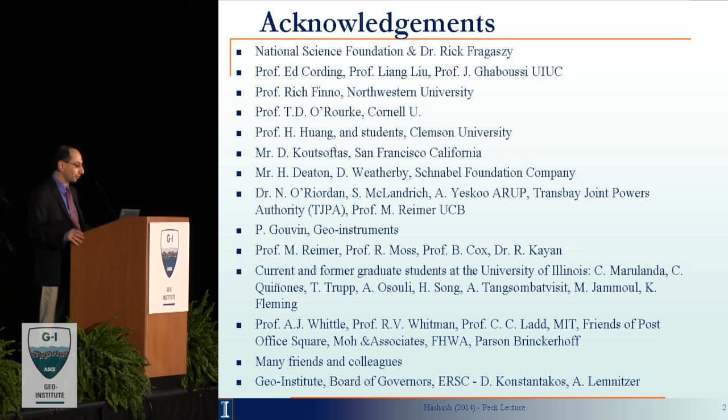Of course, my PhD committee at MIT, Professor Whittle, the late Professor Whitman, Professor Ladd, who's with us here today, many friends and colleagues, people at Parsons Brinckerhoff, and the Geo-Institute and the Earth Retaining Structures Committee.

I will first start with an introduction, motivation, what's the problem, what it is we're trying to go after. Then I'm going to describe three themes, three key technologies that I would like us to discuss. Acquiring a construction record via imaging technologies and social media.

For the young in the audience, there's some for you there as well. Think of the construction record as the action, the cause. Then we have ground and infrastructure response monitoring via network instrumentation and sensors, and this is the reaction of the ground to our excavation activities in urban areas. Then we bring those two together, and this is where we talk about modeling and estimation of ground response via self-learning algorithms. And then I'll have some concluding remarks.

Now, it's quite fitting to start the motivation for this work by the pioneering work of Dr. Peck and his work on the Chicago subway, where he represented Karl Terzaghi, all things Karl Terzaghi had to communicate and consult on for the project. And there they really highlighted the importance of the relationship between excavation support, construction sequence, and deformations and impact on surrounding structures.

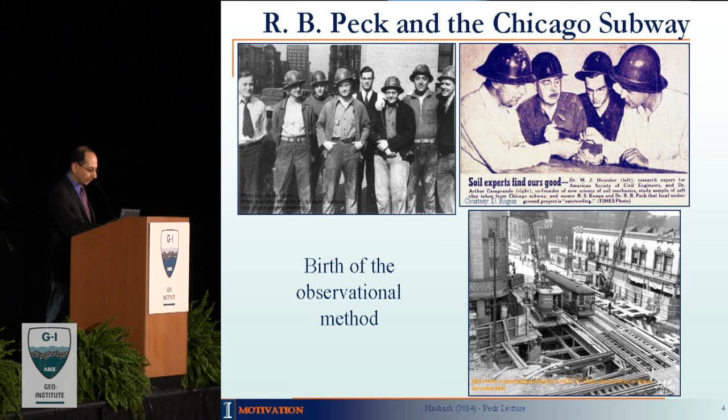And that led to the birth of the observational method. For those of you who may not know where Dr. Peck is in this picture, he's actually here. This is Dr. Peck, and also here in this image. And this is an image down here of the Chicago subway activity.

Going along with the theme of this conference on sustainability, underground urban space is essential for having sustainable cities. It will allow us to put many of our infrastructure below ground and enhance the living environment.

Now, I do recognize there are many issues and controversies associated with the Central Artery, but let's put these aside for now. We continue to be interested in exploiting underground space throughout the country. It is really a hot area. Underground construction is really interesting and challenging in my opinion.

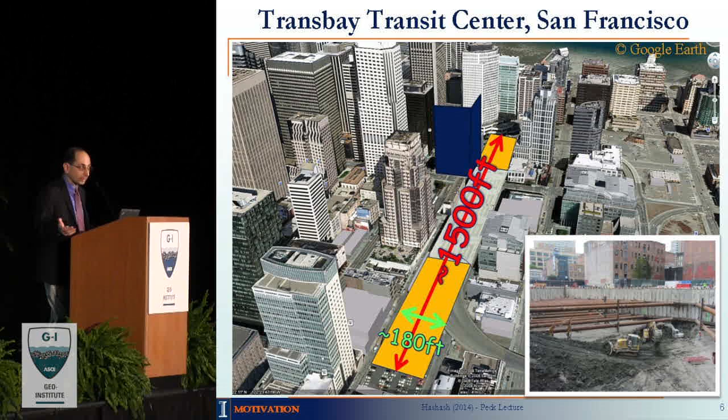Here I'm going to describe to you a project in San Francisco. It's called the Trans-Transbay Transit Center, which is designed to house what people are calling Grand Central Station of the West. It's a massive excavation, 1,500 feet long, 180 feet wide, and 60 feet deep in soft to medium clays, in a heavily built environment. So we want to develop that without shutting down the city, and also without damaging our adjacent structures.

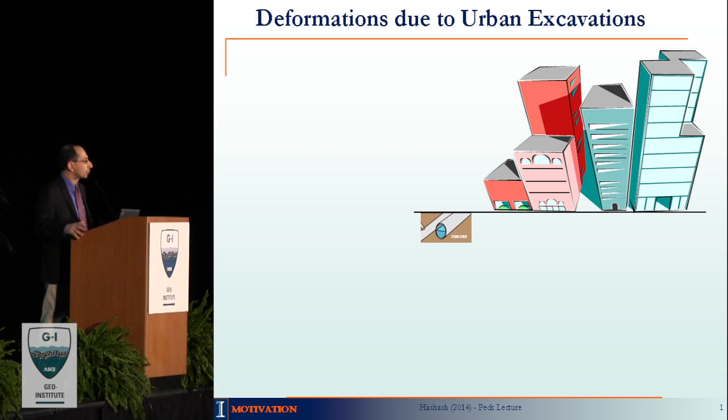So as engineers, if we look at this process in a simplified fashion, we want to build an underground space. So we pre-install our walls, and we start excavating and installing our bracing system. And because we are unloading, removing soil and reducing stresses, there's going to be a reaction, the ground will move, and we will have some wall deflections.

Now, these deformations will propagate through the soil and manifest themselves in terms of surface settlements and lateral deformations towards the excavation. If these are excessive, then we're going to have potential damage to our infrastructure, cracking of buildings, damaging the utilities. Our challenge as engineers is to develop this underground space efficiently with minimal disruption.

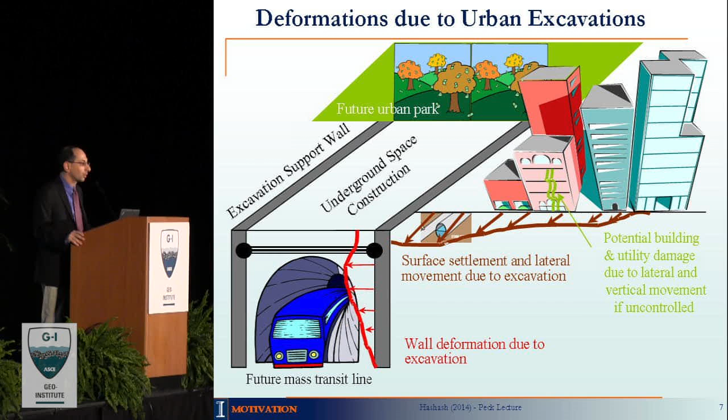It cannot be zero. Many of you who practice in this area, when you go and ask the third-party owners, so how much deformation can your structure tolerate, they say zero. Well, we know that cannot happen. So we are going beyond just simply looking at failure for these type of excavations. We are interested in keeping our deformations small.

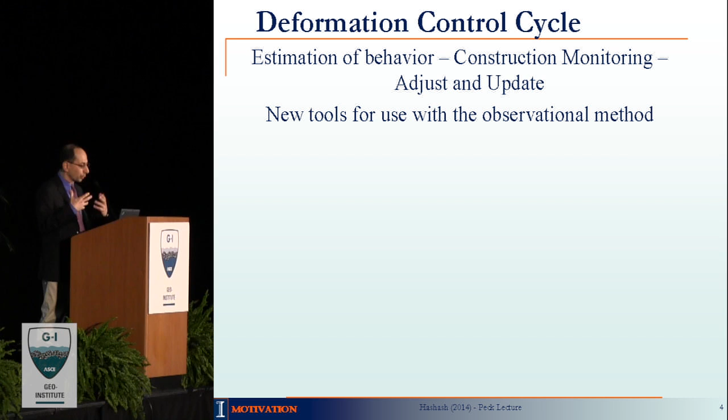So we need in our engineering to estimate the behavior. We want to control our construction, and we want to be able to be flexible, adjust and update. So what I'm going to talk about are a number of tools that will help us support the observational method. Our objective is to develop the space economically.

You want to try to control cost, but also you want to minimize the impact on existing infrastructure, and there's a tension between those two requirements. We want to have some estimate of the deformations ahead of time, the impact. We have to do a very good and detailed field and laboratory investigation program. Then we develop our design, and we go out for construction.

We want to keep track of that, and we need a very good record, because the deformations are quite sensitive to the particulars of the construction activity. Then we have field data monitoring, where we put our instrumentation and see the response of the ground. We want to present that in a way that is useful to us as engineers, and compare it with our initial estimates. Often enough they will be different.

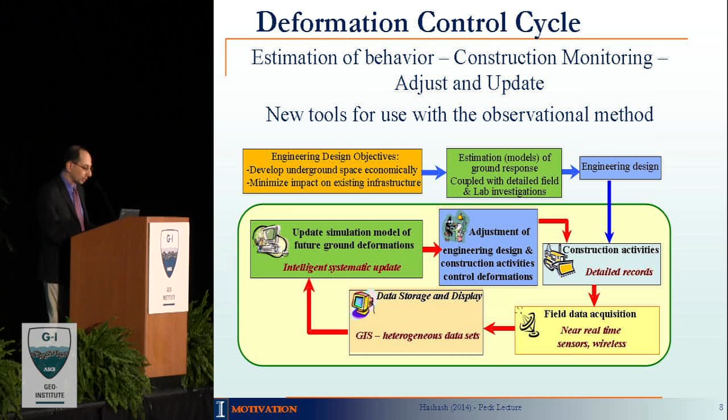We want to understand the differences. We want to be able to update our models, and learn from these observations, and then potentially make adjustments to the construction sequence, to the design, or potentially do nothing and just say everything is okay. So we've been working extensively on this loop, and I will be spending quite a bit of time talking about the construction record, field data, and the update of our models.

So we need to control for the construction process, but also we need to keep track of it. We also need a fairly comprehensive monitoring program, a fairly detailed monitoring program. And then we want to use that cause and effect information to develop higher fidelity models, because our structures are so sensitive to these types of deformations.

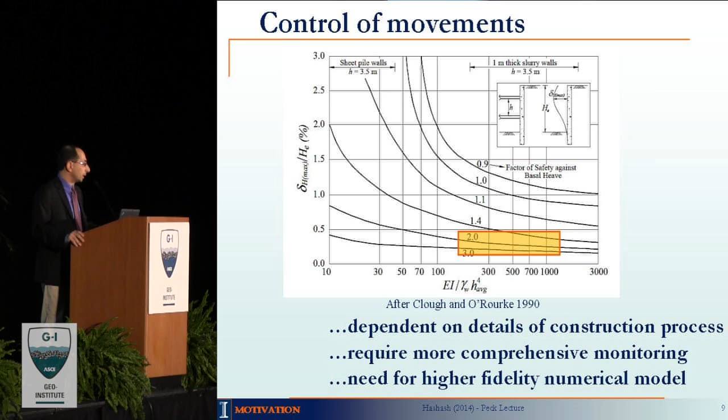Now, we'll start with the record of construction activity, and for many of you who've also been working in this field, you know that this is actually an issue. You have the resident engineers probably developing sketches of what's going on, probably not sufficiently detailed and sometimes inaccessible. We want a record that is readily accessible to the engineers and has a high level of fidelity. For that, we want to be able to capture the geometry, the change, where the berms are, when the struts or the tiebacks were installed.

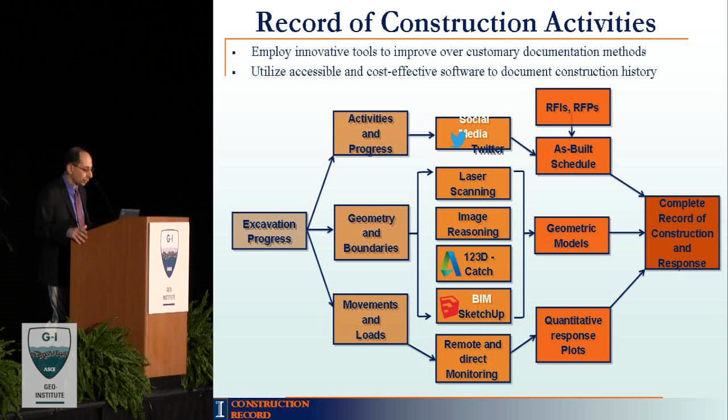So I'm going to discuss four technologies: laser scanning, image reasoning, 123D Catch, and BIM-type capabilities, SketchUp, to develop our geometric models. But not everything can be captured via imaging. We want to have a record of what's going on in terms of activities, and I'm going to describe how Twitter is being used to capture that valuable information. And of course, we have our quantitative monitoring of deformations and pore pressures that will allow us to complete the picture. So let us start with 3D laser scanning.

Some of you might know it as LiDAR, which stands for light detection and ranging. It's a principle of pulse time of flight. You send out a laser impulse in a particular direction, you time the return of that impulse, and you can calculate the distance. And if you do that many, many times, you're going to capture geometry.

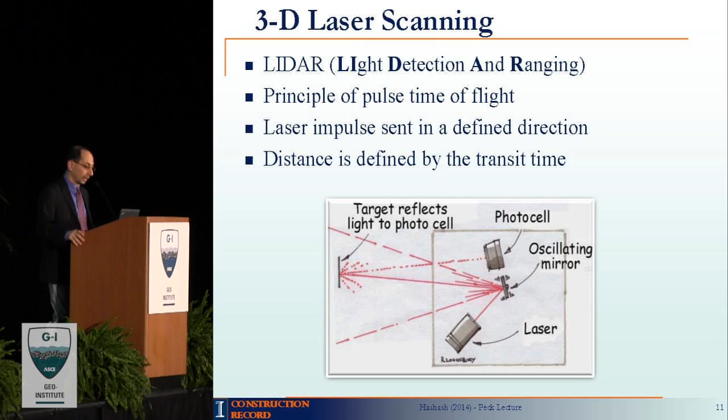So we did this work in 2004. The machine at that time cost us around $150,000 or so, and we wanted to see, would it work? It had actually never been done at that time. I think Professor Daniel remembers this discussion from when he was at the University of Illinois. We wanted to explore whether it works in a practical fashion. So in collaboration with Professor Finno, there was an excavation literally in his backyard that we had access to, and we could try all of that.

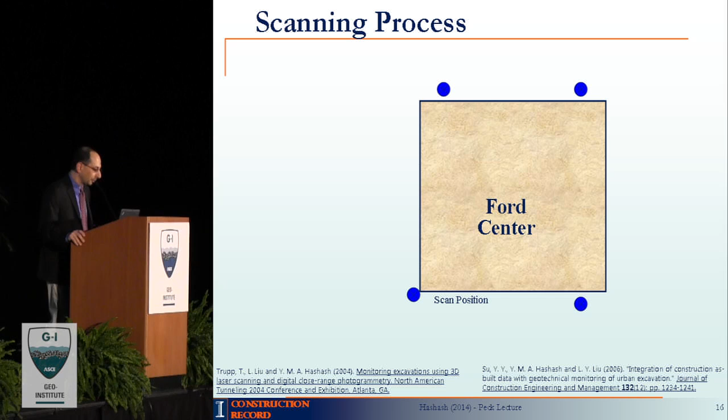Notice we started on January 30th, 2004, and we needed to see how we were going to execute this campaign. This is a line-of-sight technology, so you have to have visual access to your site. You need multiple points where you can station your laser scanner. Our laser scanner at the time had a 40-degree by 40-degree window. Nowadays, you can have them almost 360 by 360. So we needed to do multiple scans at multiple points, and then we compile all of those into a 3D model, a 360-degree model to scale.

The thing we discovered is you do not need to be at the exact same points every time you do the scanning, and that's important because of issues of accessibility on an active construction site. So that was quite helpful. We did the work about once a week. We would send out the students and spend about half a day doing that. If you can see the temperatures, they didn't call it the polar vortex at the time, but it was quite cold: minus 5 degrees, minus 25 degrees with wind chill.

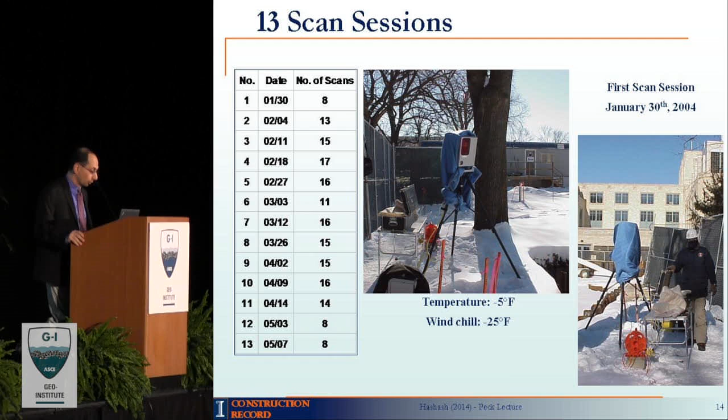And this was a good way of testing whether this thing would work. So we put heating blankets on the laser scanner, heating blankets on the laptop, and we had a generator. And our students, whenever they were cold, just took a run around the site, got warmed up, and then continued the work. So you do that, and then what can we do with this? You start with these individual scans, and then you have to stitch them. You have to develop an appropriate coordinate system.

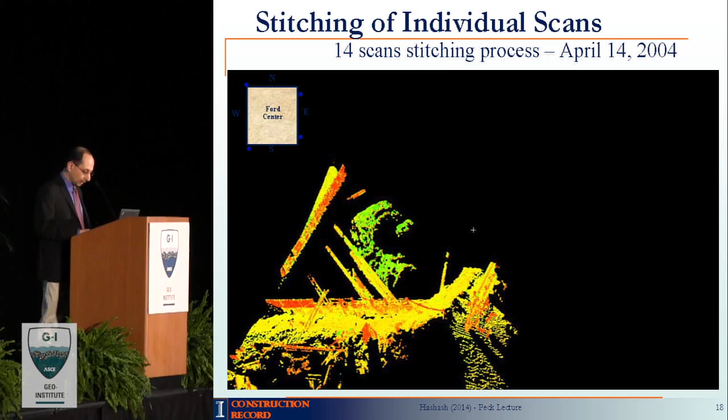And slowly you end up having a beautiful image, looks really nice, of the excavation, 3-dimensional to scale, within an accuracy of around 5 millimeters. So it's good for geometry, it's not good for deformations, this particular technology.

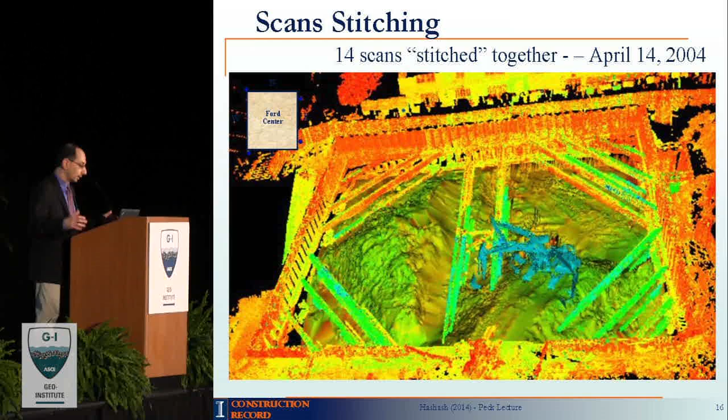Now, you can do a lot of things with this image. You can clean it up, and it'll actually scan everything inside - trees, buildings, people, excavation equipment. If you see here, for example, the excavator was moving. But what you have is a very nice image of your berms, which we know are important for estimating the deformations and doing our numerical analyses.

So we can clean this up so we can focus on our excavation, take out the excavator, take out our bracing system, and we have a very nice surface that we have a very good geometry of.

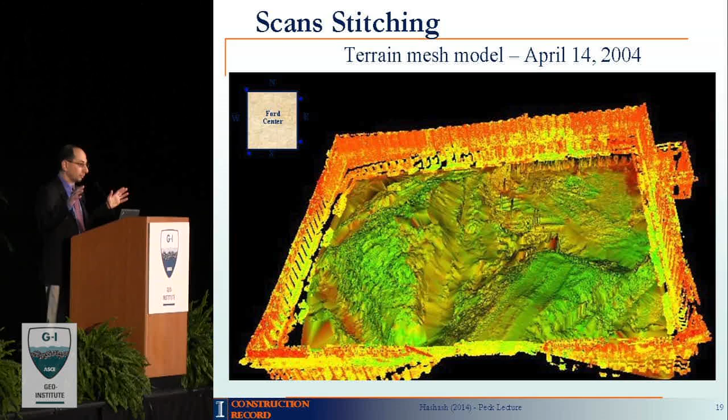It's very hard to send down surveyors into an active excavation. It's costly, it takes time, they get in the way of equipment, it's dangerous. So now I can remotely do all of that, acquire that information. I can take cross-sections of the site, and I can estimate where I am in terms of what layers I'm removing and how I'm moving the soil around, where my bracing is.

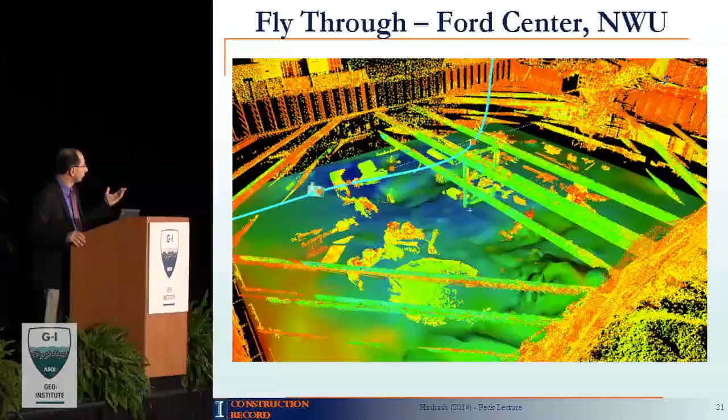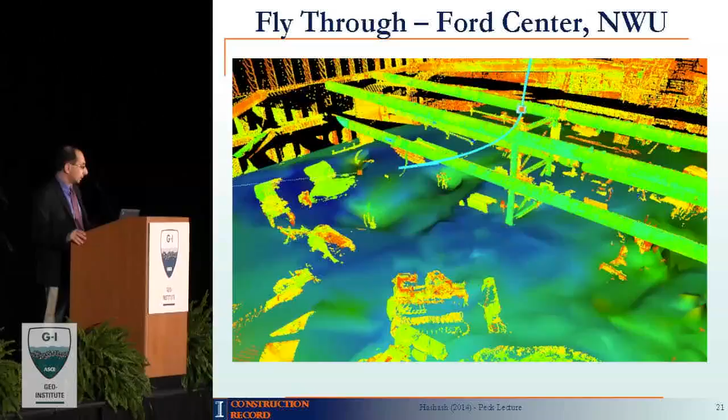And I can develop some really cool stuff. This is actually a fly-through. You're looking at a to-scale image of a 3-dimensional model of the excavation. We can get the positions of everything at the site, sizes of walers, the geometry, and a level of resolution and fidelity that we've never been able to capture in our excavations.

So really, it proved to be successful. It was a time-consuming effort - there's a fair amount of work you have to do out in the field, as well as processing back in the office.

We could do that, and we did that once a week. But when construction is going on, there are some important activities going on in between, and you sometimes need to know what's going on a daily basis, because it affects your interpretation of monitoring data, which I'll talk about in a bit. We weren't able to get it in an almost continuous fashion. So if we think of our laser scans as sort of a boundary condition of a problem, we decided to explore the use of webcams as tools to look at what's happening in the interim.

We can set up these webcams, and program them to take pictures as often as we want. On the project site, we did it once an hour. But you can end up with a lot of images. And if you were to go manually through those images and try to figure out what's going on, again, you won't have a lot of time to do that.

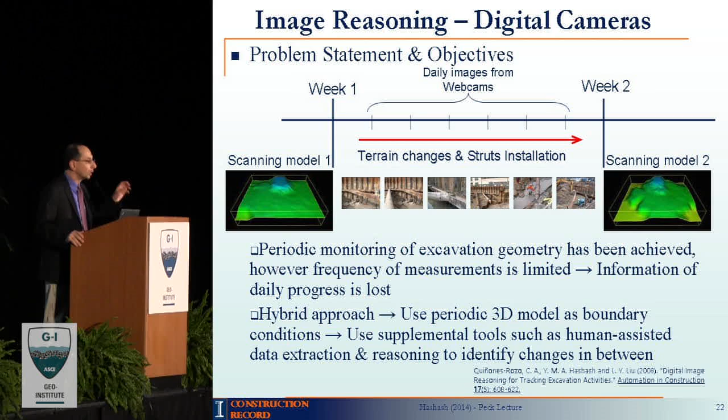So we wanted to see, are there techniques, are there ways where we can go through this information and process them in an automated fashion to highlight the changes. And that brought us into a realm of image reasoning. Of course, it's all enabled because we're using digital technology, digital images, and we have a spatial matrix, and numerically, we can represent the pixels and the colors.

The challenge for us was when you look at excavation surfaces, these are low-intensity, contrast type of surfaces, and simply doing a comparison between two images is not going to let us find out what's going on or detect that in an automated fashion.

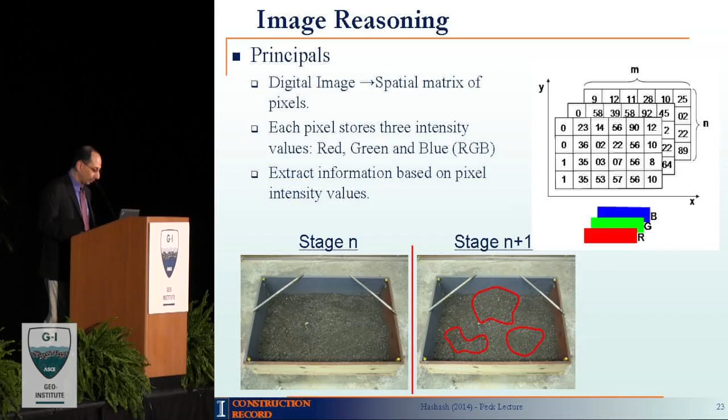This is when I was introduced by one of our students, who really went out of his way to look into these technologies - concepts we call morphological operators, whereby you do something called dilation of an image or erosion, and then you can do an opening and closing of an image. I won't go into exactly how you do that, but these are things you can do to manipulate a digital image that way. And then also we looked at how you take an image, get its negative, and when you add these two together, you end up with white space. So we took advantage of that.

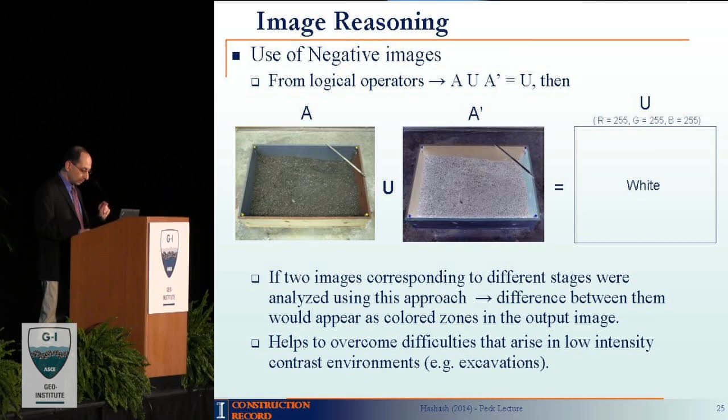The clever thing in this process is you take two images at two different stages of excavation - we had to try it in our labs before we went out to the field. You take an image, get its negative, and then close it. You take an image of a later stage and open it, and then you add those two images up, and what you're left with is the contrast of where the changes happened at your site.

And then you superimpose that on an image of the site, and you can see automatically where the changes happen. So this way you can process large volumes of images to pinpoint where the changes happened.

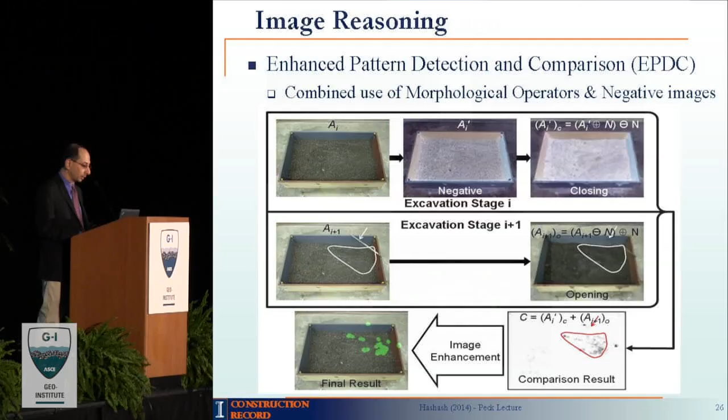In order to do that, we actually used Block 37 in Chicago, again in collaboration with Professor Finno. We had 2 days, August 8 and 9 of 2006, and at the time that camera was actually a low-resolution camera. We ran it through that process, and it captured that for us.

You'd say we have really nice techniques, good techniques that will allow us to capture this construction record, but we really were not satisfied. It's expensive to get a laser scanner. It's cheaper now, but it's still expensive. It is time-consuming and resource-consuming.

So we looked at, well, how about if I have my phone with a camera, and I go inside the site and start taking pictures. Can I develop a 3D model of that? If you're familiar with the principles of digital photogrammetry, we can do that, but you have to be at a particular location, particular distances. Your cameras have to be at a certain offset.

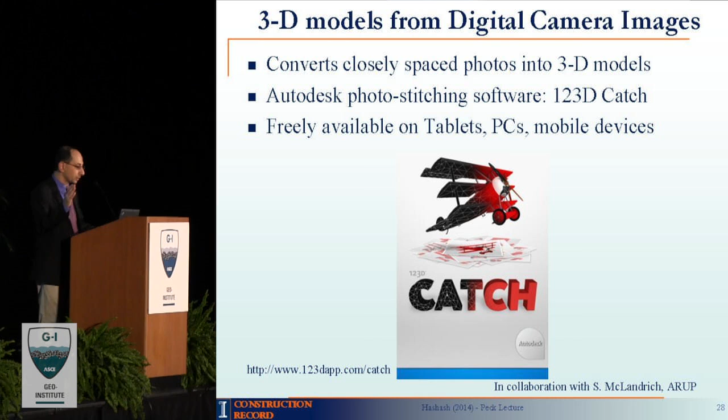We wanted something more practical. You're going down the stairs, down an excavation, you stop, take some pictures. Can I do that? Thanks to collaboration with Stephen McLandrich at Arup, we found this really fantastic software called 123D Catch. It's freely available, and it will allow you to develop 3D models from closely spaced photos, but you do not have to strictly adhere to principles of digital photogrammetry. We tried it on the Transbay Transit Center in San Francisco.

This is some of the excavation work going on there with the bracing and the berms that are on site. We went there, took those images, fed them through the software 123D Catch, and ended up with this three-dimensional model of the excavation. You can see the berms, you can see the struts, and you can see also a little bit that I have some incomplete images of the struts. That's because it's also a line-of-sight technology, I need to have coverage vertically as well.

Keep that in mind, because at the end of this talk, I'm going to tell you a potential solution to this limitation. But also look at the promise of this technology.

I use my phone or a better camera, a nice digital camera. Even if you get a really good one, maybe I can get a $1,000 camera. I can do it with a $200 camera. And I use a free software, and I can get now a 3D image versus a $150,000 investment that I would need to make with a laser scanner. So really, this is a tremendous development, and this happened just in the last 14, 15 years of research in this area. We can really do things that we couldn't think about before.

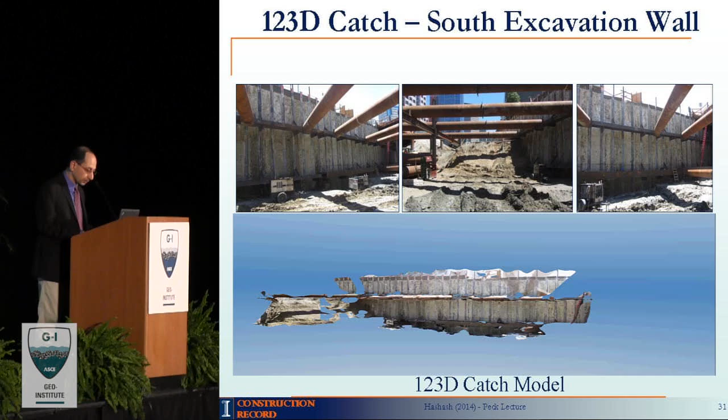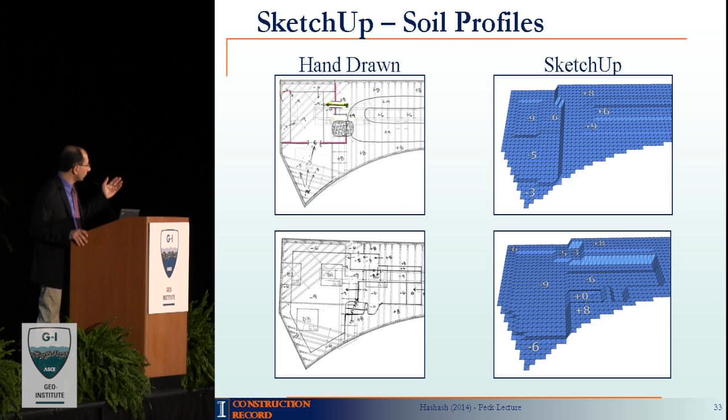Another thing we wanted to look at is how do we keep track of excavation activities, whereby the engineers keep developing these hand sketches, and we wanted something that is again accessible. I don't need a major platform, something that engineers can run on their PCs, students can do in the office at the university. So we were using this software SketchUp, whereby we took some of the hand records from the engineers and programmed them in the software.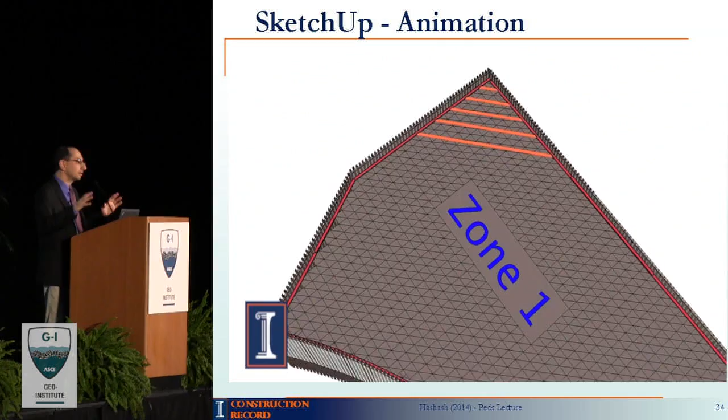What we were able to do also is to develop an animation, a three-dimensional model that will show us the progress of construction. We're able to match it with a date timeline. We can show the installation of the walers, the bracing, and then the development of the berms. And this is using a relatively inexpensive, off-the-shelf software.

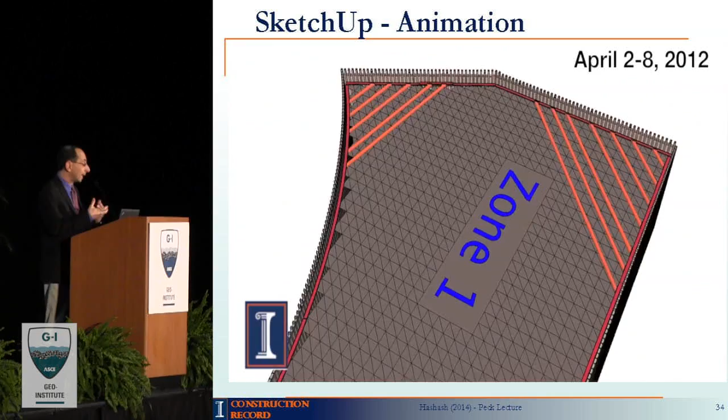Then I can take this three-dimensional model and use it in my analysis. I need that to keep that record in one place. Notice there I'm also using a digital record now, as opposed to just having sketches on a piece of paper.

Now, not everything at a site can be seen. If you're installing piles, it's happening below ground. So how do I keep track of that? On the Transbay Transit Center, the engineers came with an idea of, well, why don't we use an existing platform, Twitter? Many of the younger people are quite comfortable with these technologies and said, okay, why don't we tweet these various activities? This way you don't need a cumbersome procedure to keep track of things.

Moreover, because they were doing the operations sometimes 24/7, the engineers, even when they're going to sleep, could quickly check what kind of issues there are, what kind of progress we have. We had access to that, we could see them live, but more importantly, we were able to mine this data afterwards to develop, for example, the construction sequence of one of the shafts.

Coincidentally on the project, due to a very attentive crane operator, they found a woolly mammoth tooth at the bottom of one of these shafts.

They were grabbing these with a clamshell bucket, and they were dumping it, and the person saw it. It's now, I think, at the California Academy of Sciences.

So we have a number of technologies available to us to help facilitate the capturing of this construction activity, which represents the action.

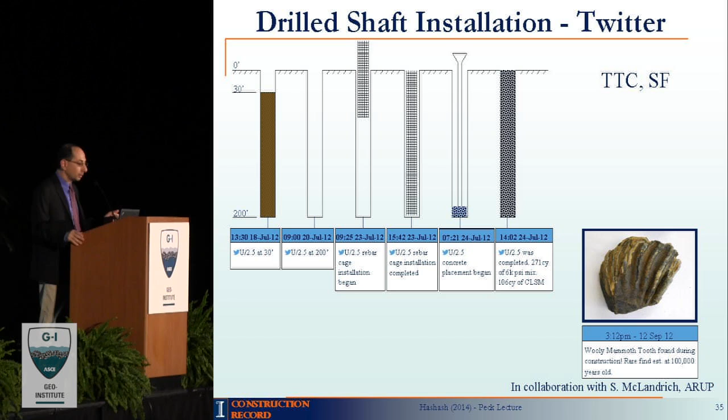Now let us move on to see how we're going to measure the reaction of our ground, how the ground is responding. The last 15 years saw tremendous development in automated and remote sensing, most notably automated total stations, where we can have targets all around a site and then automatically, sometimes on the hour, just measure deformations of buildings, of ground surface.

We've also seen a lot of developments in in-place inclinometers, extensometers, piezometers, settlement meters, strain gauges, and our ability to network these via wires or wirelessly.

The wireless networking has been quite beneficial to us because we don't have to worry about stringing lines, which would be exposed to damage, or having to wire antennas and then deal with power supply issues.

Using even cellular wireless technology, we're able to capture that data from fairly close to the source and allow us to have almost near real-time access.

Now, I should mention that while we have made a lot of advancement in terms of real-time and in-place monitoring, we still have significant challenges. For example, we find that through the use of MEMS technologies, these sensors sometimes go haywire on us, and we need significant developments so that this technology would last us for the 3-year duration of a project. I'll talk a little bit more about some of our needs in this area.

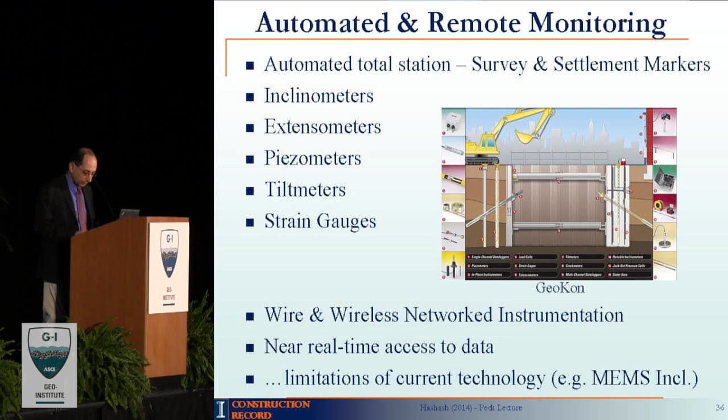So let me illustrate to you some of the technologies we have. For example, this is a total station, and this is a wireless antenna that will allow you to receive that information. So nowadays, on your smartphone, you can see what's going on at your site at any time of the day. Here also I'm showing you the webcam that was available to us.

This is the total station on the Transbay Transit Center project, and the targets were installed on the wellheads for inclinometers, which also doubled, by the way, as antennas for the wireless network. That was really a very nice development and innovation.

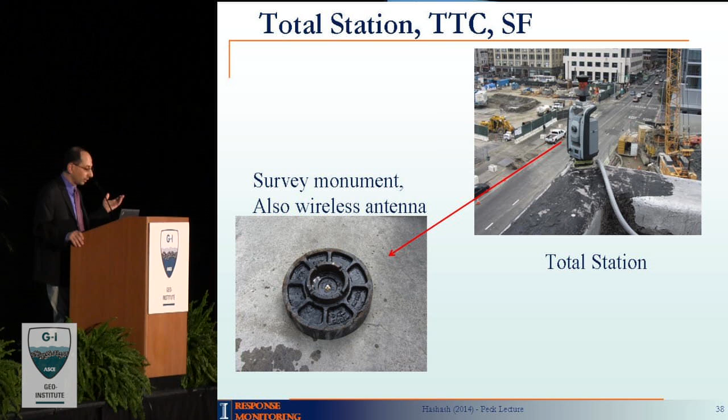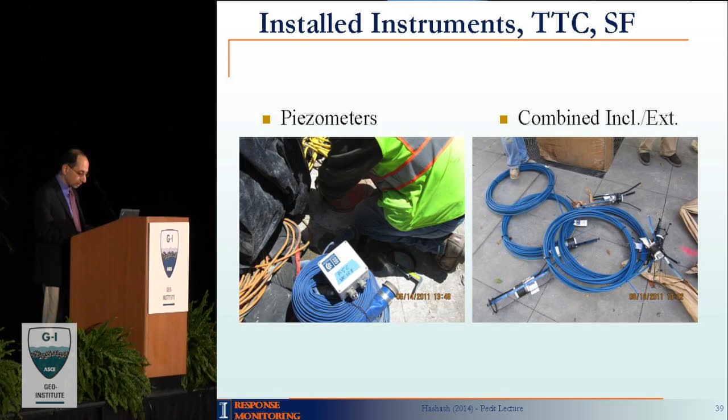Just again for illustration, we have other kinds of instruments: inclinometers, extensometers, piezometers. We introduced the use of flushable piezometers to try to observe the potential development of negative pore pressure under the footprint of the excavation, as well as significant instrumentation of the struts there.

Now you can get this information. I'll show you a typical set of data you get. So from the record of construction, we know what has been happening in the excavation, and then we can match it with our observations, say, of piezometers on the Transbay—this is for the Transbay Transit Center. This is simply for illustration of what you can do with this fairly continuous stream of data.

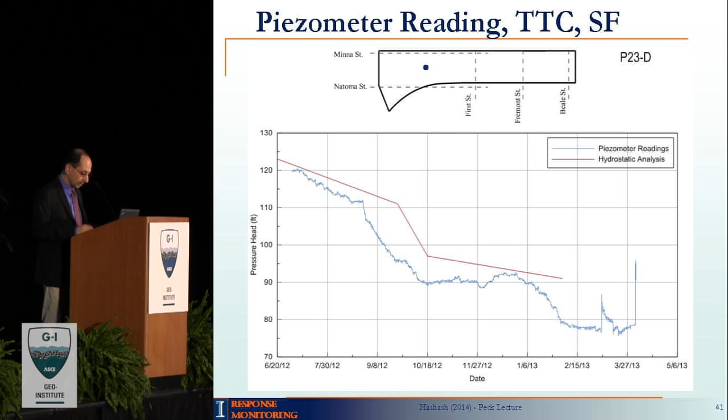Now we're looking at multiple streams of data, and one of the things we run into from prior experience is that sometimes the data is not warehoused in the same location. Sometimes in certain projects you find your calibration data is in one place and the actual measurements in another, and good luck trying to actually match them up or find them.

So we looked at how we can use the concept of a data warehouse to combine fairly heterogeneous data sets—image data, numerical data, different types of data, constant versus varying data that require timestamps. For that, we actually looked at using a GIS framework in the background to house all that data and tag it with appropriate metadata.

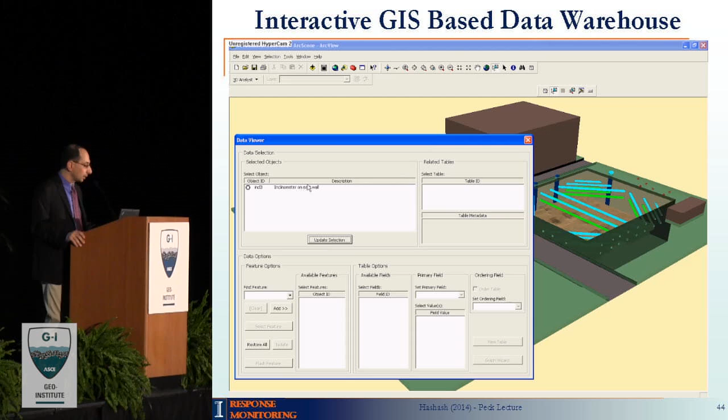On the front end, you just have a fairly friendly user interface that will allow you to access any instrument and pull up the data, as well as plot that data that was measured for that instrument. You can also look at the geometry of the excavation.

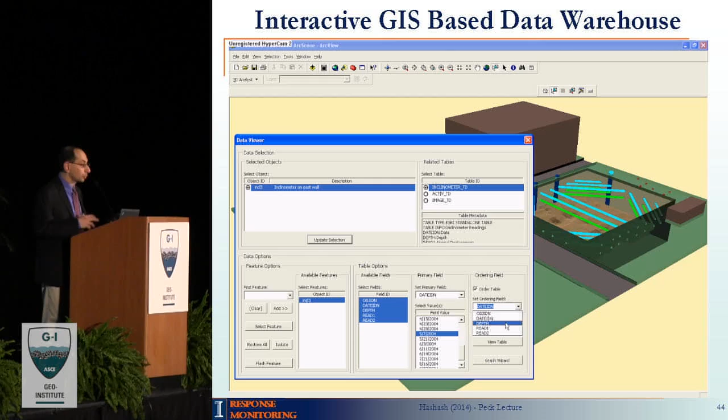We did this for our research activity, but we've also seen it now employed in a number of projects, including the Transbay Transit Center, where it's called a global analyzer. You open up this web page, you can select any instrument, and you can get a record with that.

Now there are challenges with this, because sometimes you need to reset your instruments, and you cannot just simply expect it to go on its own, working by itself without any additional interface with the data.

So now what can we do? Why do we want this fairly continuous stream of data? Of course, we needed to make sure our third parties are not adversely affected, but also we can have better interpretations and understandings of the engineering behavior.

This is an illustration of data we obtained from the Central Artery project. We had a wealth of data on the strain gauges on struts, and we wanted to understand the behavior of these struts and the impact of the thermal load, which is an important element in interpreting the loads in these struts. We found there, because we had such high resolution data, that the coefficient M, which represents the change in load over the change of temperature, is construction stage dependent.

Up to that time when we published this, we were using a single value for this coefficient to separate thermal loads from earth loads. We find that actually it is construction stage dependent, and therefore we can have a better resolution of our information that way.

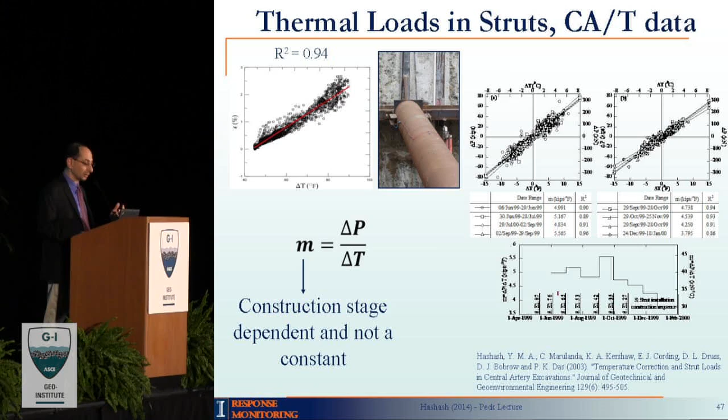And this is where I'm going to talk about small is beautiful - the importance of small strain nonlinearity in interpreting and estimating ground deformations. Burland in '89 recognized that. It's actually the title of his Rankine lecture.

This is an illustration of the importance of the soil model you work with. Think of this as a model that does not incorporate the very small strain nonlinearity variation in the soil. And this is a model that does incorporate that, and the model that does incorporate that better captures the surface settlements that are very important for us in the excavation problem.

The work I've done with Professor Whittle at MIT also highlighted this, the importance of small strain nonlinearity formulations in our models. I know Professor Stokoe had to leave.

He apologized he couldn't be here, but I think he'll be quite thrilled for me to state that VS is really a fundamental geotechnical parameter, not only for dynamic problems, but also for static problems, VS being the shear wave velocity of the soil. It's something that we want to measure, and we want to measure reliably on our sites to be able to get this initial maximum modulus.

This is where you start your nonlinearity. Moreover, we need to have better tools to characterize the soil behavior in terms of our laboratory testing at small strains as well. Now, over the years, we've seen acceptance by the profession of the importance of small strain nonlinearity, and you can find it in commercial software, for example, such as Plaxis.

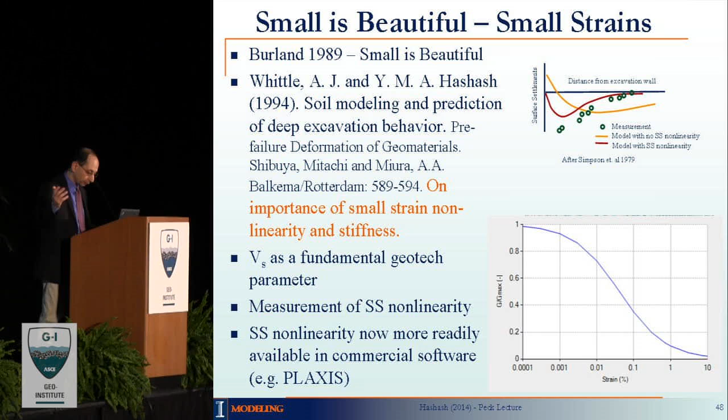And this here is actually some of the shear wave velocity measurements that were done by Professor Moss, Dr. Kane, and Professor Cox at the Transbay Transit Center, whereby we're looking forward to actually publishing some results of the impact of excavation on shear wave velocity of soil.

Now, what can we do with all this data? Well, we can develop empirical relationships or semi-empirical relationships where you combine your data with some additional modeling to parameterize that. And we've done that in collaboration with Professor Juang and his students at Clemson.

And we come up with some empirical correlations whereby we can develop initial estimates of surface displacements and also damage index or potential damage of adjacent structures. So that's one way we can utilize the data.

I will not go into the details of these models, but there are also other uses of these data, which is learning from that. We talk about learning as engineers from experience, from data. And the question for us is, can our models learn?

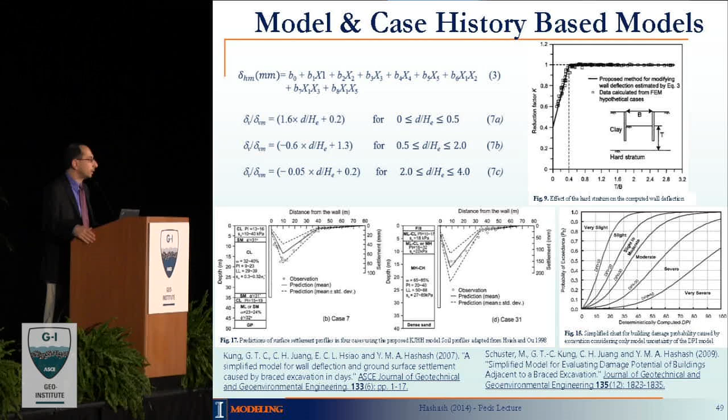I think sometimes the answer would be no, based on our experiences, but I'd like to hopefully convince you that actually we can do it otherwise. We know that there is a strong relationship between the soil model and the displacement around an excavation. So that's actually an important clue for us.

That strong relationship means that there is a potential for using inverse analysis type techniques. This is whereby you use your boundary measurements to infer the soil behavior. Now, there are two classes of inverse analysis techniques that I'd like to talk about today.

One is parameter optimization. So you have a soil model, let's say a hardening soil model or an MIT E3 model, for example. You have a set of parameters, and then you change them, adjust them using certain rules and logic, so that you can minimize the error between the estimates from the model and the observations.

So that's one type. Now, the issue with this type of parameter optimization is that you are always going to be limited by the quality of your soil model. So if it doesn't have, for example, anisotropy, no matter how much you optimize this model, it does not have anisotropy. If it doesn't have small strain nonlinearity, the same thing. But on the other hand, it is readily available within a commercial software framework, so it's easier to use.

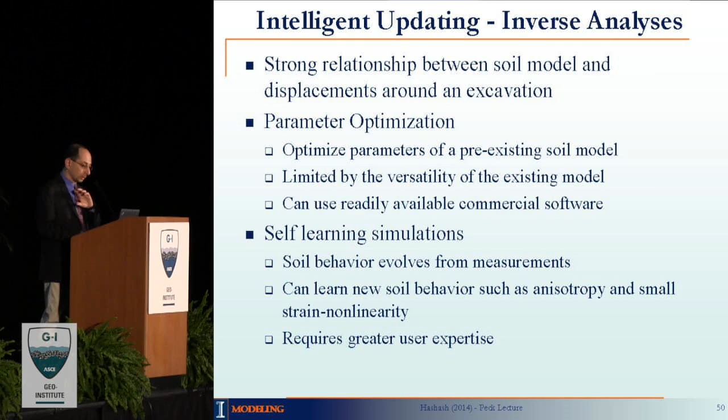Now, there is another class of simulations that we can work with, which are called self-learning simulations, and I've been developing these over most of my career at Illinois, whereby we allow the soil behavior to change, to evolve with the data. You can learn new soil behaviors, such as anisotropy and small strain nonlinearity, but it requires greater hand-holding, let's call it that way. So I'm going to focus on the work on inverse analysis with self-learning simulations.

So I have my field measurements, both geometry and response. And so instead of doing a single analysis and then continuing to change parameters, I'm going to run two analyses in parallel. In the first analysis, I'm going to impose my construction sequence, the geometry, the action. And due to equilibrium considerations, I'm going to stipulate that my stress field represents fairly well the actual stress field that is in the soil. And I'm going to extract that at my material points, integration points.

I'm going to run a parallel analysis, and I'm going to impose my response, my deformations. And because of compatibility considerations, I'm going to say that the strains within that domain are a reasonable approximation of the strains in the field, but probably the stresses are not. So from one analysis, I have stresses. From another analysis, I have strains. Stress, strain, soil behavior, right?

Now, in order to benefit from this information, I need a model that I can adjust along the way to adapt to these stress-strain relationships. If I use conventional models, I have to, every time, send a student for 3 years to develop a new constitutive model and come back. So you can see that iterative process can take a while. So what I need is a flexible model that will actually learn on the fly, a model that can adapt. And this is where we use a neural network material model.

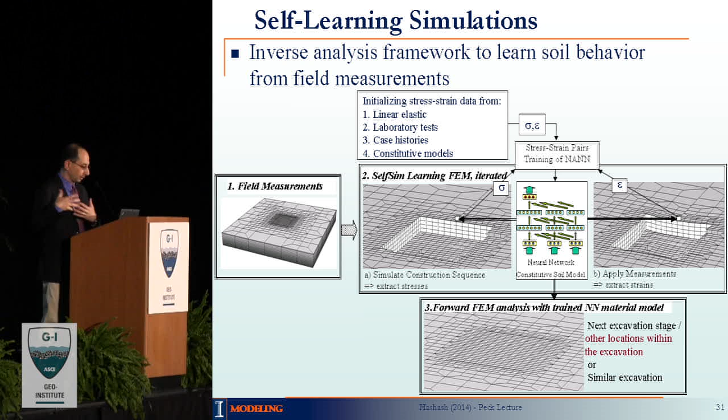But hold on, I know some of you may have said, okay, there he goes. These are models that can learn, can adapt. And you would initialize them to represent, say, elastic response over a narrow strain range. And then from there you can, in fact, predict future excavation stages or other case histories in similar soil profiles. So what is this neural network thing? Is it a black box? Well, somehow.

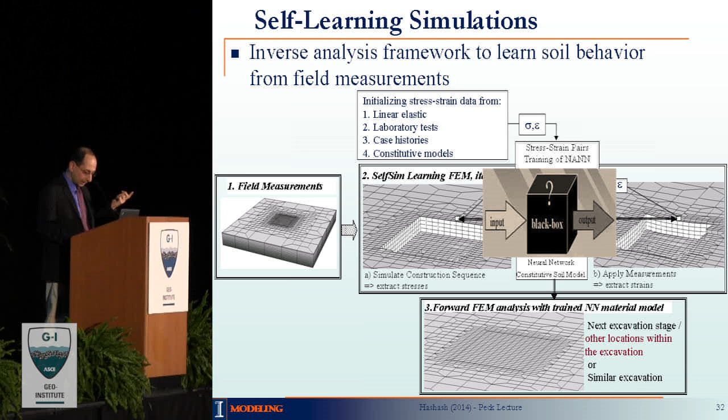But let us look at the origin. Where does it come from? It's actually modeled, patterned after our neurons, and the way we learn, that is, they can adapt, they can learn. They are nowhere as powerful as our brains, but they have attributes that can tremendously benefit us. And they can adapt. And so it's a soil model that will evolve, will change, and will learn. And so you're probably thinking, prove it.

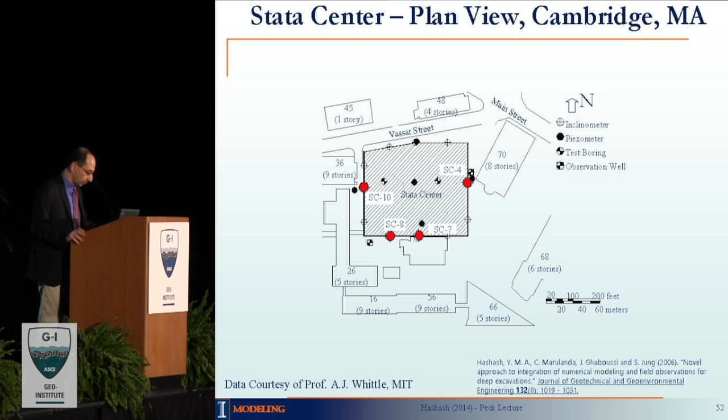Well, hang on there. So the first thing we worked with, and of course I have to go back to my roots, was Boston blue clay. Thanks to access to data from Professor Andrew Whittle, the Stata Center on the MIT campus was a well-instrumented site where they also had a very good handle on the construction history. This is a typical profile there that we have, and it's something that we're familiar with in Boston, and this is the over-consolidation profile at the site.

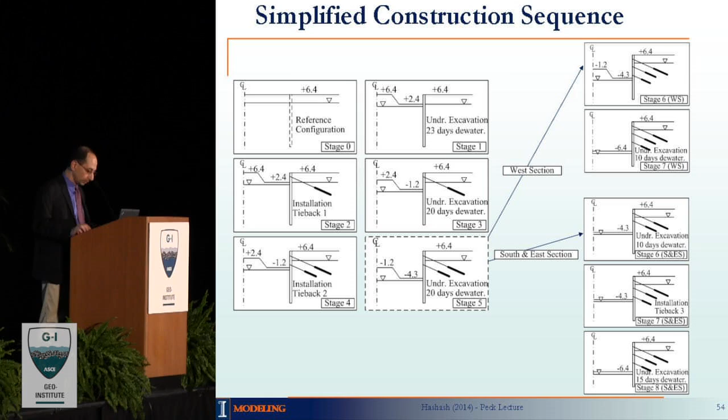We had the information also on the construction history. We had the west wall, and then we have the east and south wall sections, and they had different construction sequences. And so what we said was, okay, let us see if we can learn the behavior on one of the sections and see how well we can do on the next section. So these are the measurements on the west section, and then we started our learning process.

So what we did is we trained the model initially, that neural network material model, to represent elastic behavior at a small strain range. Then as the learning process continues, where we use lateral wall deflections and surface settlements in this algorithm, we let the model do whatever it wants. And probably those of you who work with inverse problems are thinking uniqueness. What happens there? Do things go haywire?

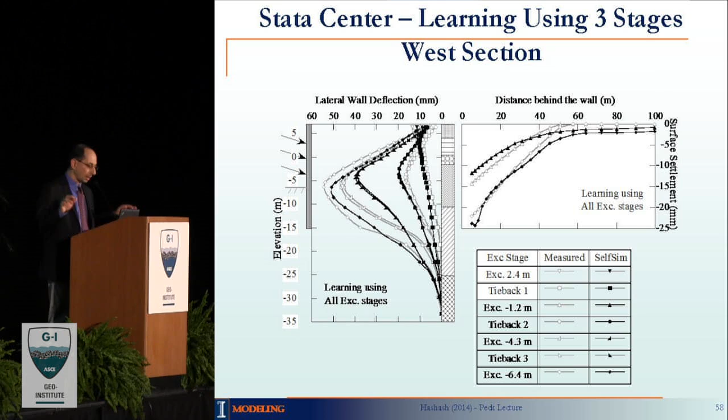Well, let's look at that. So as we introduced additional stages, the estimates improved until we got something that matches pretty well the observations. We said, okay, it did a good job on one section. Can it do a decent job on the other section where we have a different construction sequence but the same soil profile? So we took it there, and it actually gave us pretty good estimates of the surface settlements and the lateral wall deflection. I didn't try to get a perfect match because I think it becomes less believable. We just did it. This is the best value. This is what we got from our analysis.

So then what is this neural network constitutive model? What did it learn? Did it learn something that is reasonable? Now, we've done a lot of evaluations of these type of models and what comes out of them, and you can find that in several of our papers, but I'm just going to show you and illustrate that once.

So this is a 2D model, so we need to look at plane strain data, and I think Professor Ladd knows this data very well. This is the measurements on resedimented soil in Boston blue clay, a plane strain test for over-consolidated and lightly over-consolidated soils and normally consolidated soil.

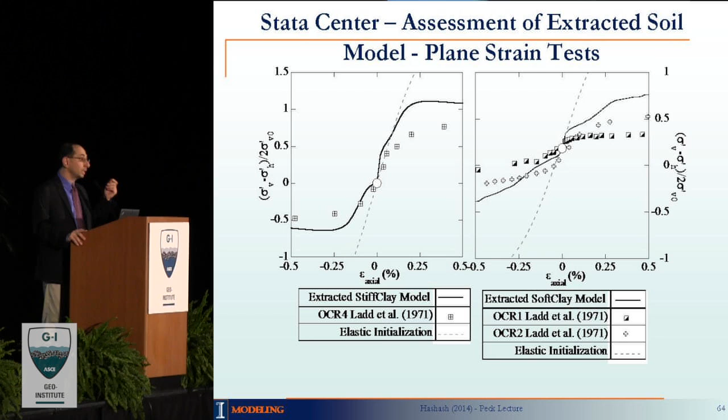When we started this iteration, the model we started with is this light line here, and you can see we are completely off relative to the actual behavior. So now we let the model do its thing using the measurements from deep excavations, and we get a model that is much closer to the measurements in the lab. We did not use a single lab test in our model. We just used the boundary measurements of lateral wall deflections and surface settlements. And then we obtained a soil behavior that is quite reasonable vis-a-vis lab data. Now that's really important for us, and that has a lot of potential for us, and I'll talk about that later on.

So now we have this new tool. We need to think about different ways of using it. Often enough on a project where we have a lot of instrumentation, we lose our instruments. They get damaged, the workers accidentally cut cables, damage markers, etc. We have a lot of these accidents. Can we utilize this tool to compensate for missing data?

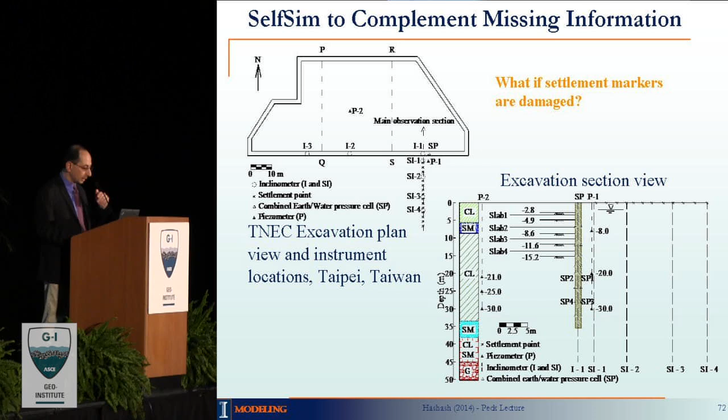So what we did, we used the TNEC site, well instrumented, it's in Taipei, Taiwan. And we had measurements of wall deflections as well as inclinometers behind the wall, as well as surface settlements. And we wanted to use this SelfSim algorithm to learn the behavior. This is before we started any learning, to show you the mismatch between the initial model and the data. And this is where we initialized it using linear elastic behavior over a small strain range.

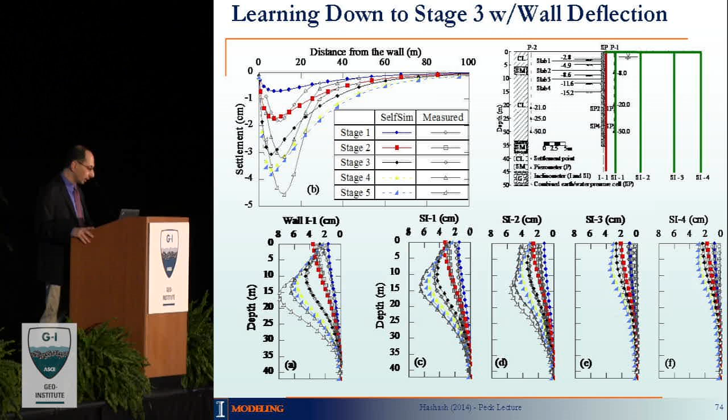And so we said, well, why don't we just use wall deflections only in this learning process and see what kind of estimate we have for deformations elsewhere. So think of these as quote-unquote predictions elsewhere. We use our wall deflections down to stage 3, and then we look at how we did elsewhere. Well, for SI1 is okay. We're underestimating here. We're not doing very well here, not that great. And surface settlements are okay, not great, but okay. So you can see, even with wall deflections, we did a pretty decent job, but we're still off.

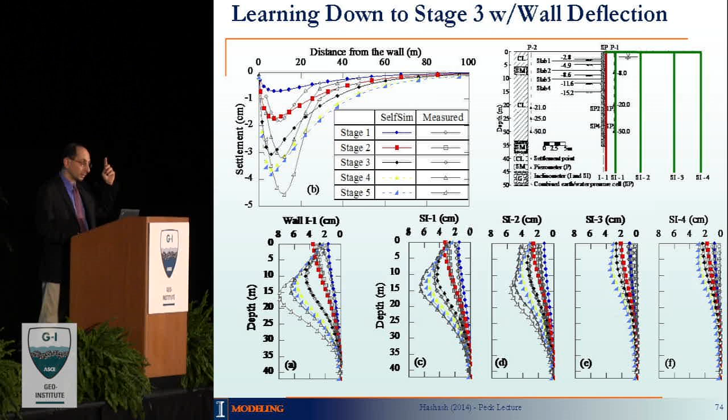Now we said, well, suppose I have the inclinometer at the wall, and also another inclinometer at distance. Suppose these were the only 2 instruments I had. How well do I do elsewhere? So I use that in my learning, these 2. So this is not a prediction, this is you're learning that behavior there. And we look at how we did elsewhere. We're doing better. We're still doing a little bit overestimating here. And we significantly improved our surface settlement. So we used 2 inclinometers to get a very good estimate of our surface settlements. You may be concerned a little bit about here, it could be due to 3D effects. And we'll talk about 3D in a minute.

So from this study and also some theoretical studies, we found that using these learning techniques, we can compensate for some missing instruments. So now when we're thinking about our instrumentation program at the site and the redundancy, we can bring in also our computational tools as well. So computational tools are not just to sit there out there and you do them either before or maybe much later, but they can be part of the construction process. They provide us, we find also that inclinometers at the wall and at some distance provide us important information about small strain nonlinearity in the soil.

Very valuable piece of information. We also, based on our study, found that bracing loads can significantly enhance our estimates of deformation. It's really good, though we haven't demonstrated it yet with a case history, just based on a theoretical study.

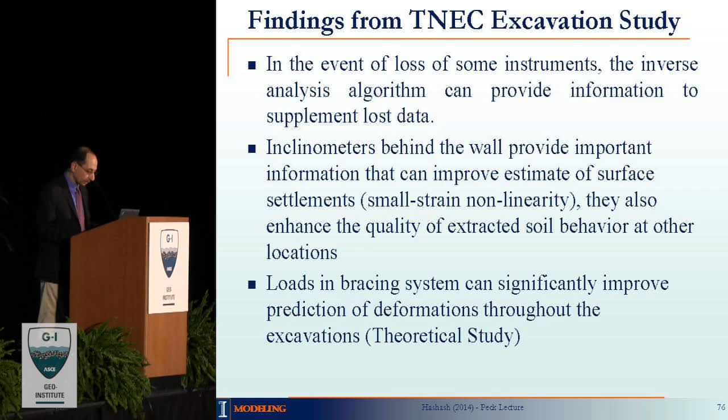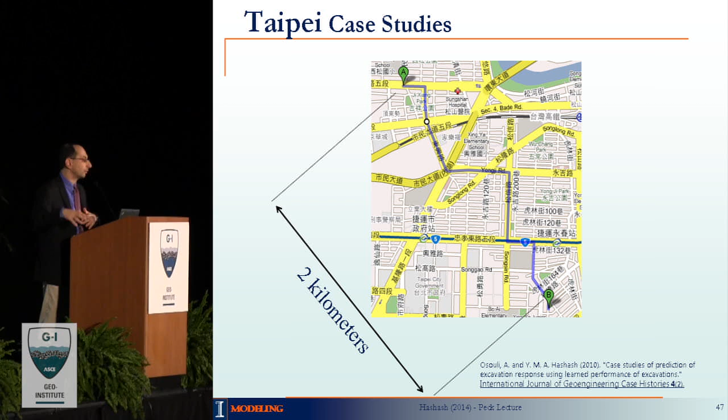So now you say, great, you can do a better job at one site. How about a different site in the same city, with a slightly different stratigraphy? Am I still going to do a good job? Well, we have a site, TNEC, where we learn the behavior, and a site 2 kilometers across, Formosa Center, and we wanted to see if we can estimate the observations at Formosa given what we have at TNEC.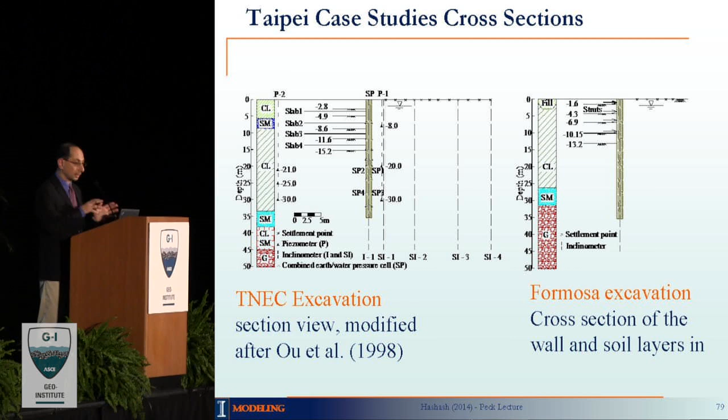So these are the observations. Top is TNEC, which is what we used to learn. Bottom is Formosa, which is what we're trying to, quote unquote, predict. This is our learning, we learned this information there, and now we just use it as is to estimate what happened at Formosa.

Different construction sequence, slightly different stratigraphy, and this is what we get. Really good data, I checked multiple times with my student. This was done by Abdolreza Osouli, I think he's probably here as well. It was quite impressive that our models can learn, and learn in a flexible way.

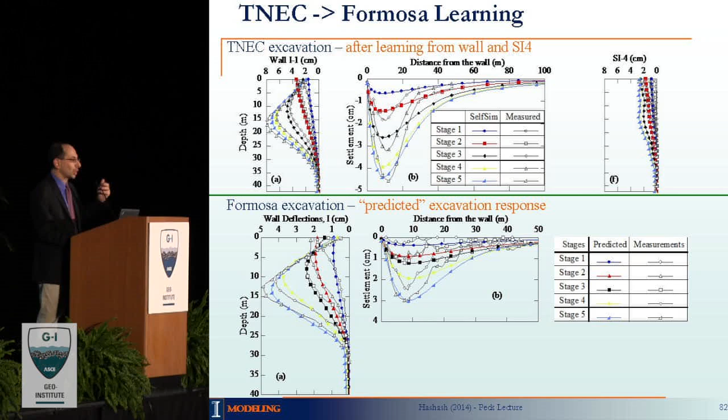So this is all 2D. How about 3D, all this 3D geometry that we talked about? Can we benefit from that? Can we learn from that information?

Well, this is back to the Ford Center, and we had some inclinometers there, highlighted here, and we wanted to use those 3 inclinometers in our self-learning simulations. Fortunately for us, we've done laser scanning, so we have a very good record of construction, where the berms are, where the struts are. We developed an algorithm whereby we can take the 3D laser scan and develop a finite element mesh.

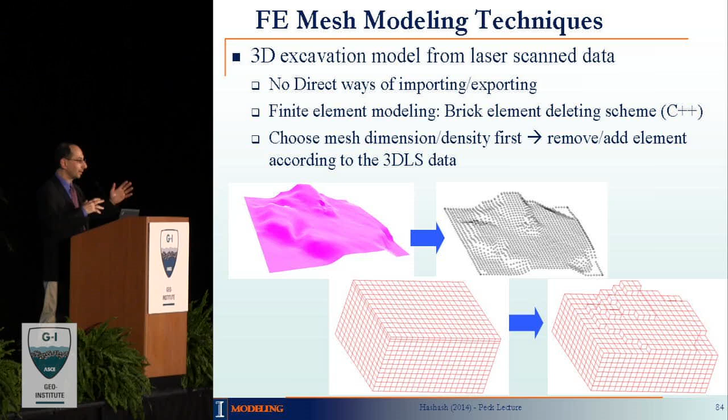You see, now we're using that to close the loop. At the time when we were doing that, our computational capabilities were limited, so we selected some of the stages, not the weekly scans, not all of them, and represented those in our finite element mesh.

And then we started our learning process. Again, we initialized our model to be linear over a small strain range, and then used the data, shown in dashed line, to learn. After learning, using these 3 inclinometers, we got a pretty decent match. We don't capture some of these sharp edges, and I'll leave that for a later discussion, but we have a pretty good estimate.

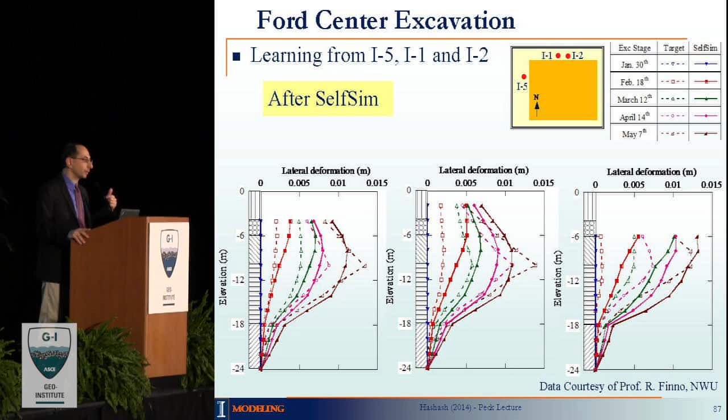Now, we wanted to see how well we capture settlements. We didn't have very good measurements of settlements, but Professor Finno had developed semi-empirical equations for estimating 3-dimensional deformations around excavations, so we used those estimates as our so-called measurements.

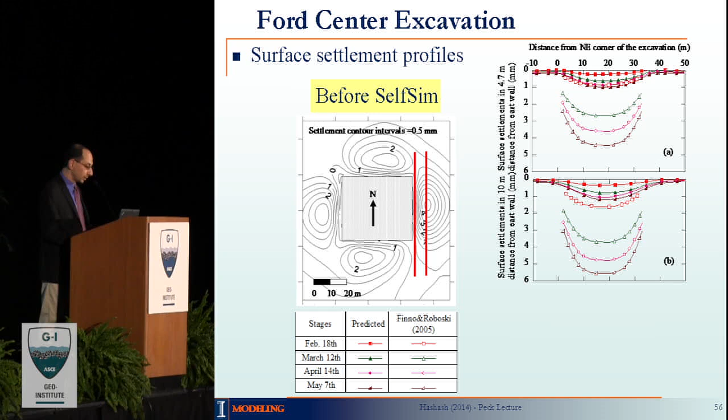What you're seeing in the solid dashed line is before our self-sim learning. We did not use this in our learning, we're doing here a prediction of those settlements, and this is what we get after our learning. We actually get estimates that match the empirical data, and that gave us confidence in what we have been doing.

We also looked at a couple of other sides of the excavation. You notice here that the settlement trough from the empirical relation is symmetric, but ours is not. That's because there's a difference in ground elevation on one side of the site relative to the other, and that shift is expected. We don't have it embedded in the empirical equations, but we can capture it in the model. Nevertheless, the estimates are quite consistent and gave us significant confidence in our modeling capability.

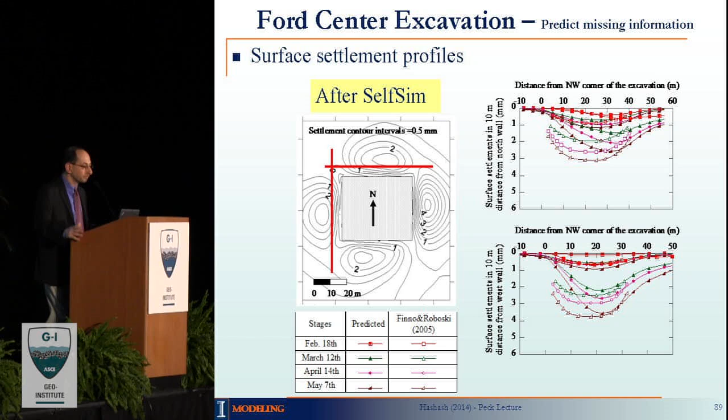Okay, so are we done? No, by no means, there's a lot to be done.

One thing is next generation automated sensors, there's a lot of work needed there. We need much more robust sensors that will work under the water table and won't have trouble if they're exposed to water, and that can work in aggressive environments, including stray currents. Urban areas can have stray currents that can really throw off your sensors.

We need something that can do that. Sensors have to be cost effective, and they need to be stable over many years. It's not sufficient to have sensors that work well for a month or two—try 3 or 4 years, and you'll see the challenge.

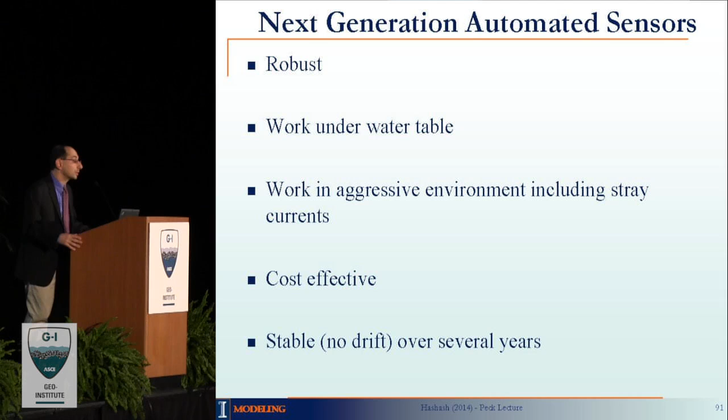The other one is big data. We hear a lot about big data. We have big data, and we're going to have more data than what we currently have if we know how to manipulate it. We have a lot of image data and video, both still and video. We need ways to process that.

We're seeing pervasive sensing. Are we going to just acquire the data and simply store it and not use it? How are we going to use it properly? Do we need to be selective in our recording and use of data? Can we automate that via some smart algorithms? We need tools to sort this data and present it in a timely fashion.

That's important. And then we have the challenge of data curation. As civil engineers, our structures last 50, 100, 100 plus years. Don't we want that data to be available later on? Especially if we move everything to digital, all these records that sometimes we find of some bridges hidden somewhere would not exist. So we need a way to curate the data.

And if you think about our digital age, it's significantly shorter than 100 years so far. So we have a major challenge. How do we curate this data?

Then the issue of soil model development and how do we integrate our laboratory testing. Currently, the process we have is we go to the site, get the samples, test them, and then try to find parameters that would fit well for a model. Or sometimes we send our graduate students to develop a brand new model and then use it in a boundary value problem. Can we short circuit that process?

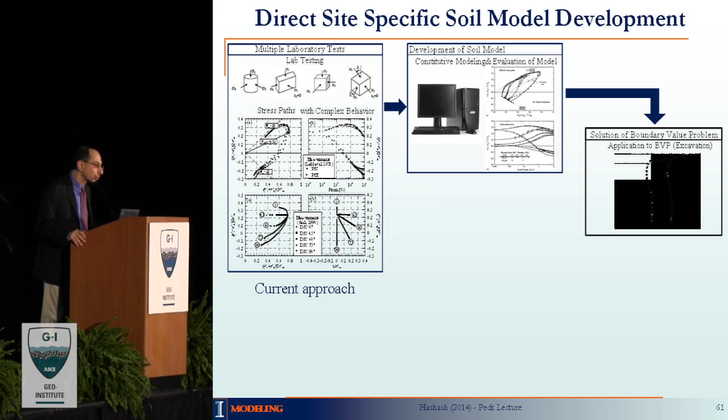Well, can we use the same self-learning framework and use it to directly develop our soil models? And actually the answer to that is yes. We have one PhD done and another one on the way to demonstrate that you can directly go from a lab test into a soil model that you can use in a boundary value problem and solve a problem. I can short circuit that process, but there's a lot of work needed. This is where we're talking about integration of our laboratory testing with our modeling.

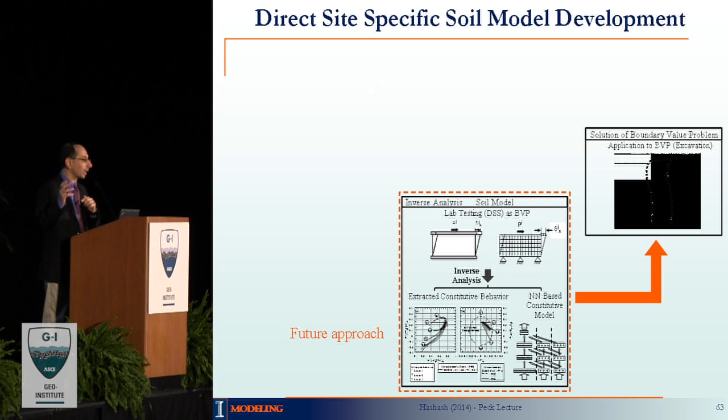Bring those together. And last is drones. I think many of you have been hearing a lot about drones. They had a lot of bad rap. Just 2 weeks ago, I decided to go out on the Transbay Transit Center site and explore a drone. For those of you who are interested, it's an AR drone 2.0. It has 2 cameras, one front, one bottom.

You can control it from your smartphone, and you can have a GPS unit on it. You can program it to go around the site and take an image of the site. So if you remember in my 123D catch, I had areas where I couldn't take a picture because I couldn't be there, or actually it's hazardous—I'm not allowed to be there. Well, I can fly my drone there.

It actually caused quite a ruckus. I had lots of people around me watching us fly this drone, and it's really promising. It is tremendous. Everybody was upbeat about it, and so who says that geotechnical engineers don't use the latest technology, including drone technology? And that brings me to my conclusion.

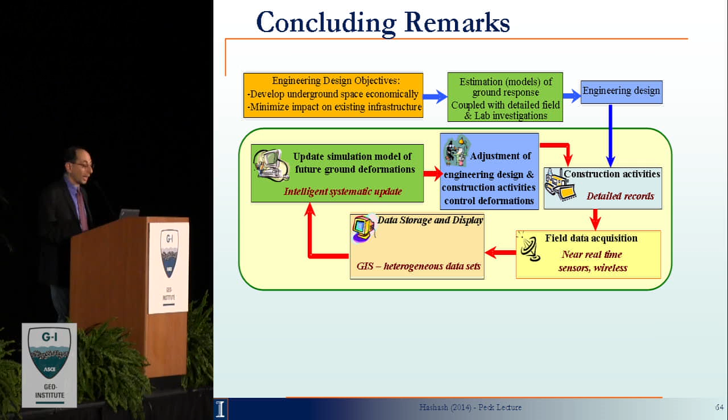Our challenge in urban areas is to control deformations around deep excavations because we need to develop our underground space. Often we're dealing with marginal soils, soft soils, and we're trying to control and limit those. So I talked to you about a number of technologies that will help us in that process, in enhancing our observational method.

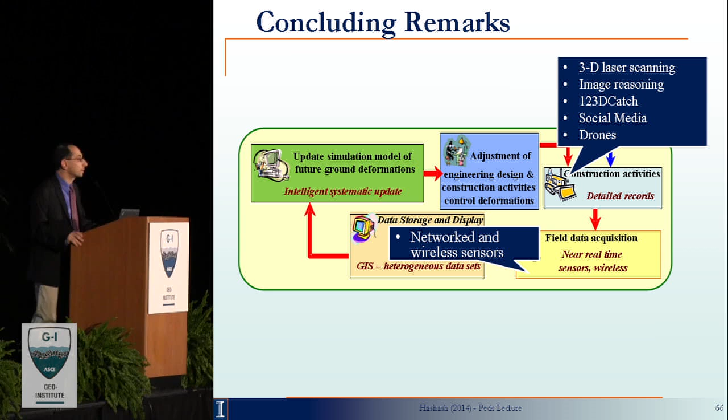Using a number of tools that represent some of the latest in technology: 3D laser scanning, image reasoning, 2D images, 3D images, drones. I talked about network and wireless sensors and the challenges we have with these sensors. And then also our self-learning models that have a different way of looking at how we model soil. Maybe we look at developing personalized soil models or region-specific soil models that will truly benefit from available data and learn from that.

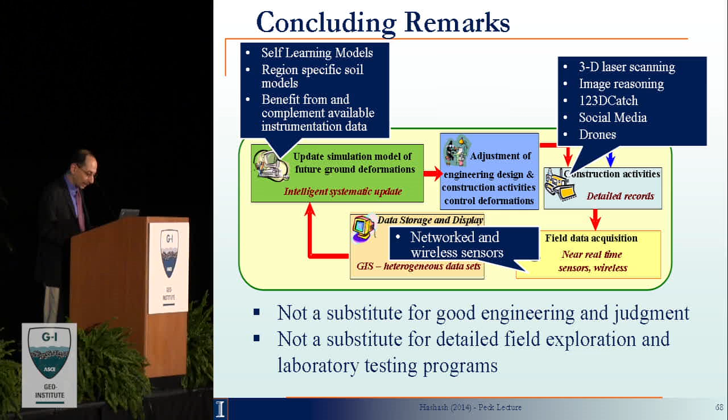Now, all this technology should not have us forget the basics. It is not a substitute for good engineering and judgment. It is not a substitute for detailed field exploration and laboratory testing program. And with that, thank you very much, and happy to take any questions.